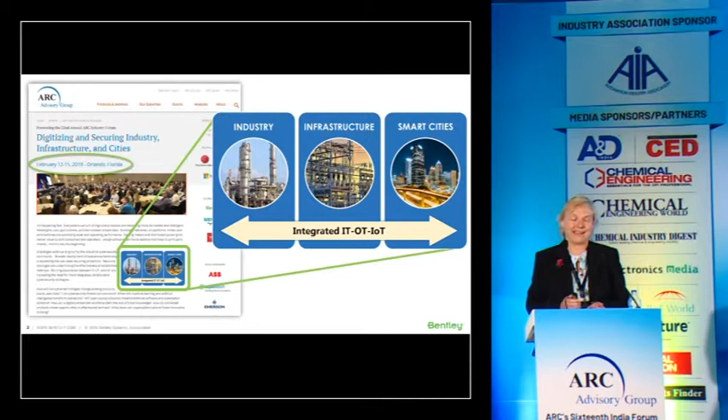So here we go. One of the things that we noticed back at the Orlando Forum was that ARC have expanded beyond industry to infrastructure and smart cities. And this gives me a good opportunity to introduce who Bentley actually is. We are not the vibration monitoring company of Nevada. We're not the car company either, although my accent might confuse you. Basically, Bentley is a software company, and we model and simulate the world of infrastructure. By infrastructure, we mean roads, bridges, railways, buildings, cities, industry, that kind of thing.

ARC ranks us. We respond to three of their reports. First, asset reliability and software services in the industrial space. Also engineering design tools in the BIM space, and you can see we're number one in asset reliability and number two overall in engineering tools, and we're also featured in the GIS report and number two there too, in terms of everything that we do being geographically located.

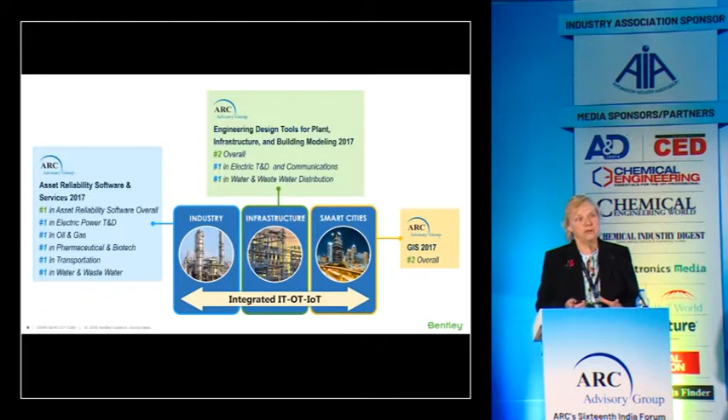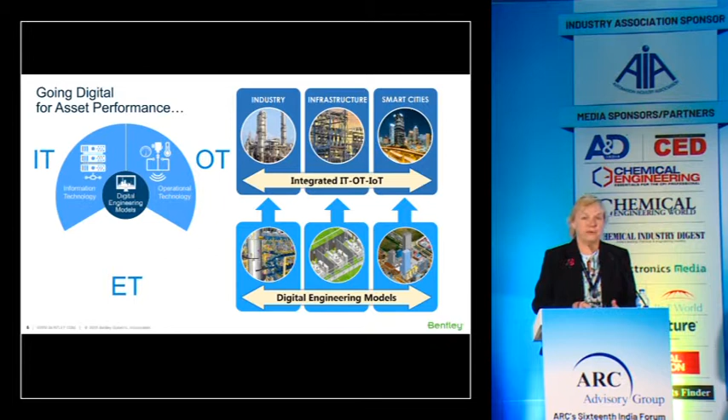So we're a software company that plays in both the operations and the capital project space, simulating and modelling infrastructure. What we bring to the world of the industrial Internet of Things is the convergence of IT and OT with engineering technology through digital engineering models. And we believe that this is a way of making sense of a lot of the information and making it easier to make decisions about all this massive amount of data that you've got when you've got good engineering information that is supporting those decisions to change your operations or to revamp or replace something.

So now I come on to reality modelling. For those of you who aren't quite sure what it is, basically it's the taking of digital photographs and turning those into accurate 3D models. Last year, we integrated in with the photographs laser scanning, and we also introduced a mobile app type of thing, being able to take photographs on a mobile phone and create these models.

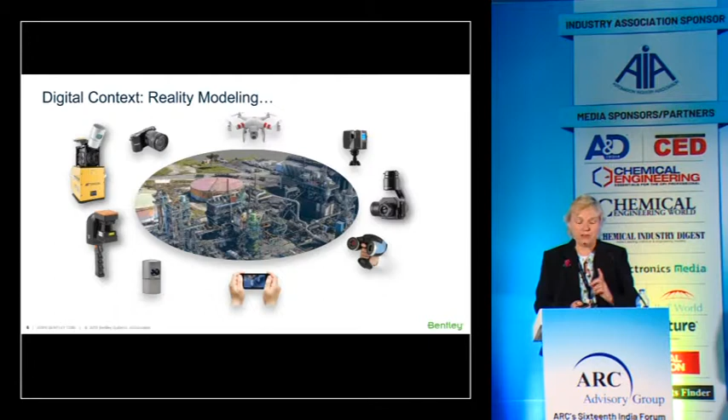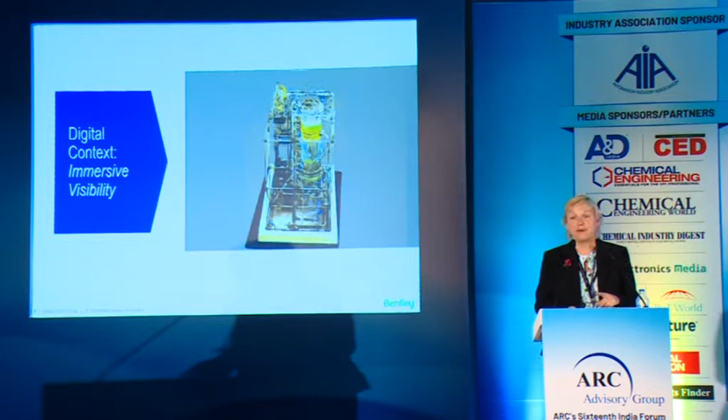Just to give you a little bit of an idea, you might remember this. We worked with Siemens to model this skid plant. My colleague Gernot there took 540 photographs of this skid and produced this reality model of their process automation skid. They'd not been able to laser scan this because there's too much glass and so on, but the reality modeling produced a pretty good model there.

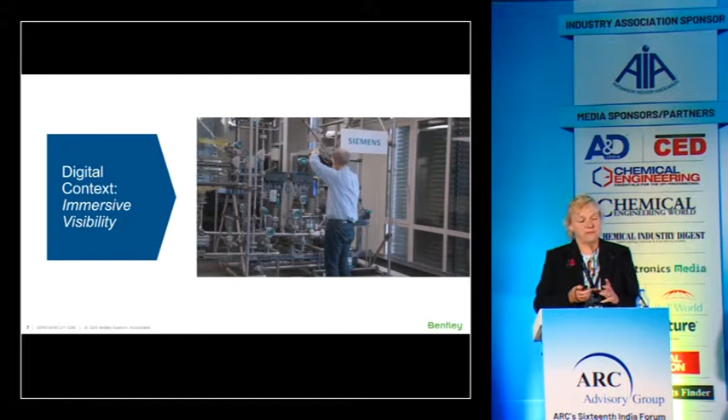So basically it's providing this context of your existing assets in a 3D environment. One of the things that we do every year is ask our users to submit their most impressive projects. And I've got a couple of examples here of the use of reality modelling in the smart cities environment. Basically, this company created a smart city model of the new city in Shenzhen using both hybrid scanning and photogrammetry.

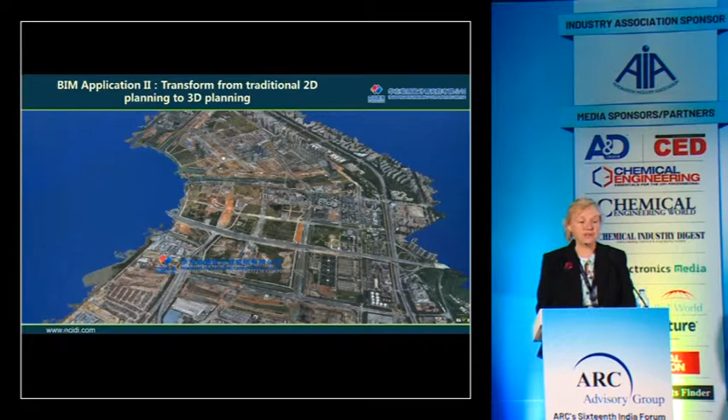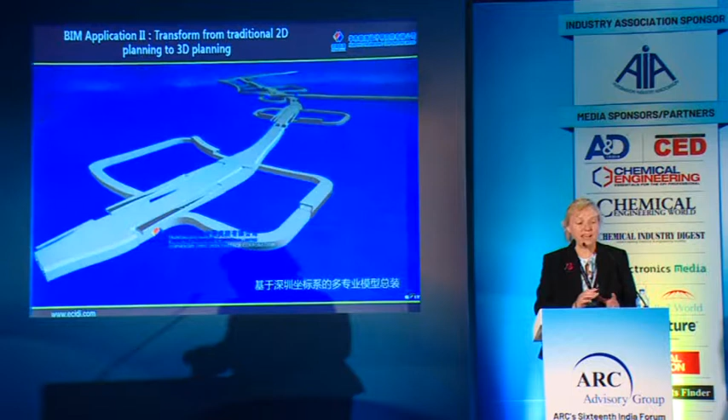But the next example, and the video is going to play, is a BIM application where they've gone from traditional 2D planning to 3D planning, combining reality modelling of what is actually there with the BIM 3D models of what they're planning to build in this city in China, basically.

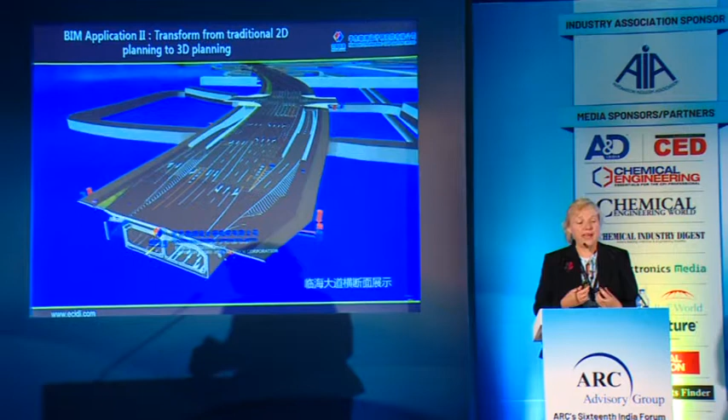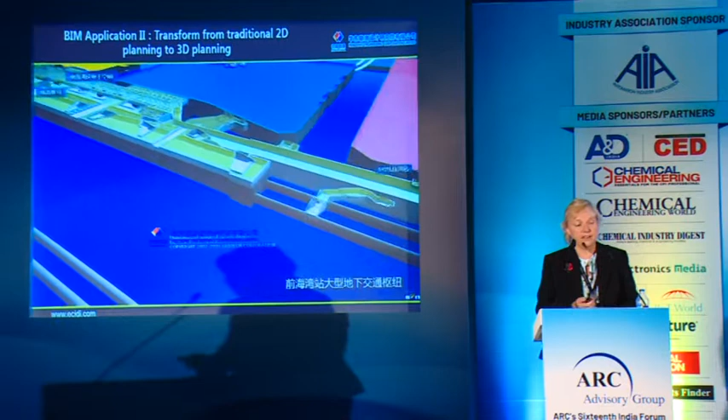You can see as the video runs through how they've combined the 3D designs of the roads and underpasses with the reality model of what's actually there, to give a really good idea of how to plan and execute this project.

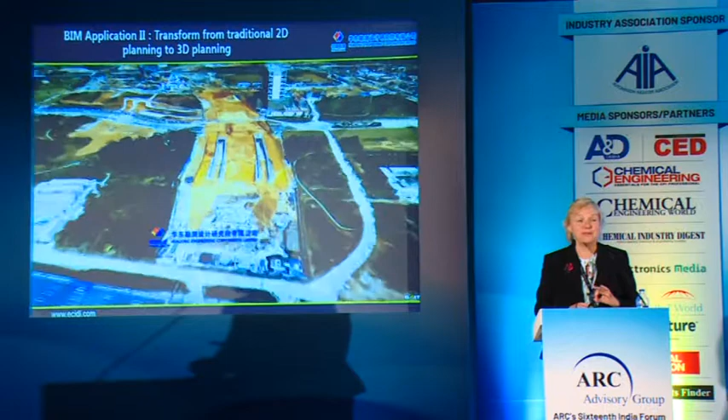This was one of the finalists in the reality modelling category. Interestingly, from 2016 we had 3 submissions in the reality modelling category. In 2017, we had 47 submissions. These two city examples are just a couple of examples - I have another one a little later on.

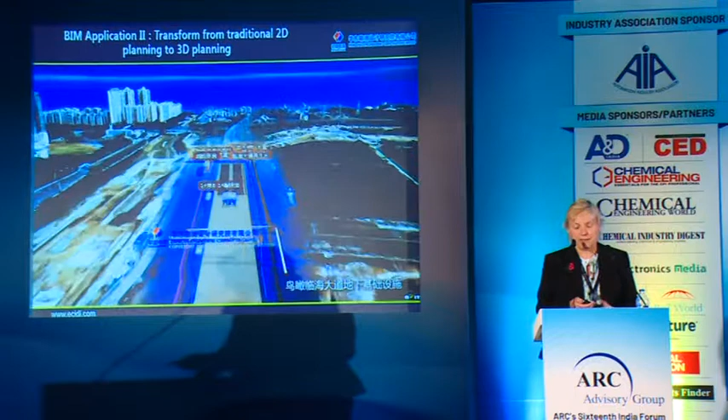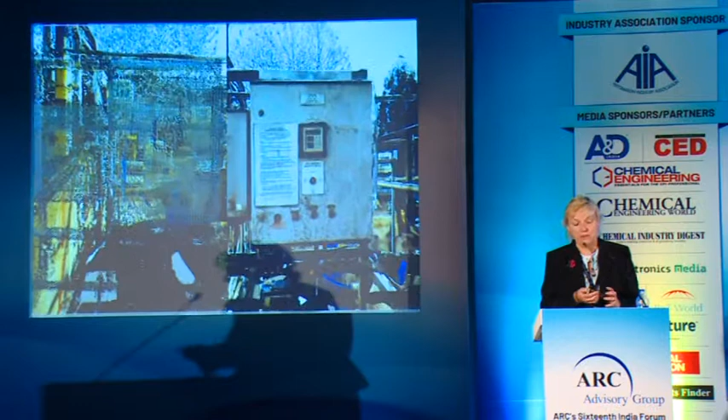I mentioned the integration of laser scanning with reality modelling. As this video zooms in, on the left-hand side you can see laser scanning, and as you approach the model it starts to lose detail - it becomes very granular. But on the right-hand side you have photogrammetry combined with laser scanning to give real precision - you can read the sign, you can measure very accurately. It looks almost like a video of this plant, but this is actually a reality model with a bit of laser scanning, and on the left-hand side is what a laser scan would do.

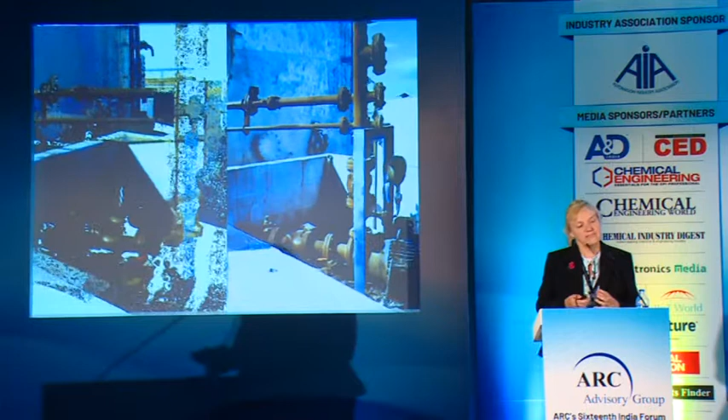Now we're using this technology quite extensively to inspect existing assets - our users are using this technology to inspect assets and also be able to automatically pick up some things. I'm going to come on to that now in a little bit more detail.

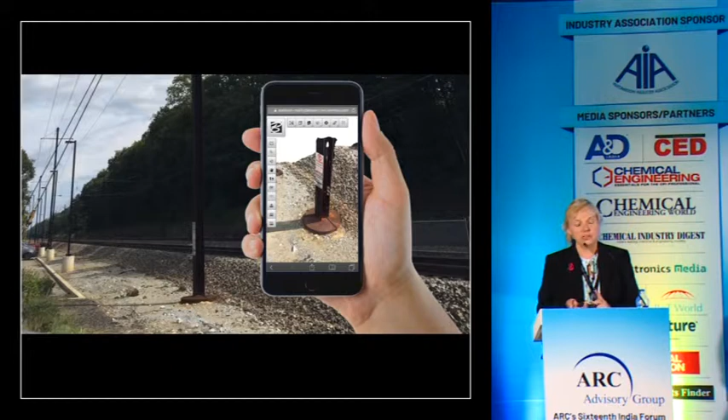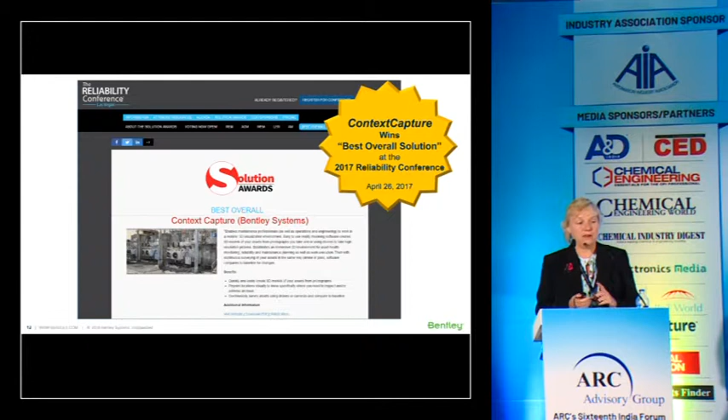I mentioned also the mobile app. We introduced this last year - basically being able to take photographs on your mobile phone and automatically create a small reality model of what you're looking at, then share that with an inspector back at base. This is really revolutionizing a lot of maintenance and inspection. It actually won an award itself last year at one of the main maintenance conferences that happens in the USA.

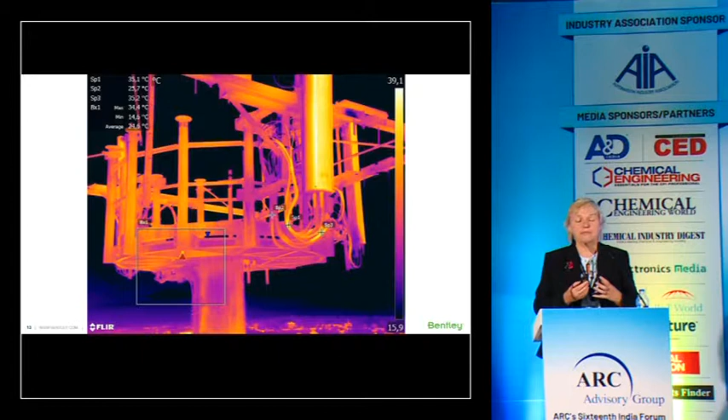Now integrated with reality modelling - with the photogrammetry and the laser scans - we've also added other imaging devices like thermal imaging and things like this.

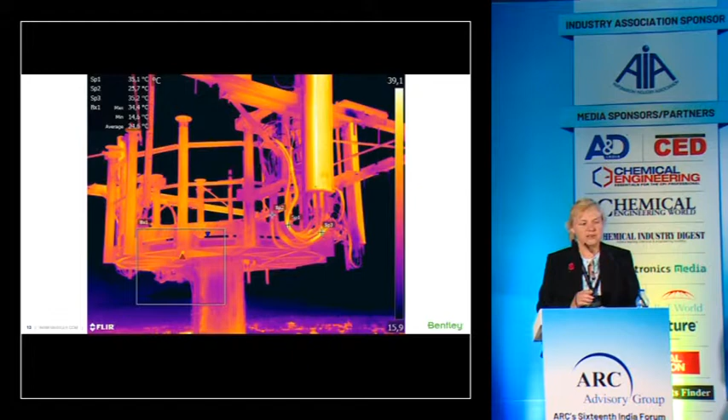I'm going to come now to some examples in the telecoms industry, and I think the telecoms industry are probably the most advanced in terms of using this technology. This was one of the special recognition award winners from last year - another reality modelling example, of inspection of cell towers.

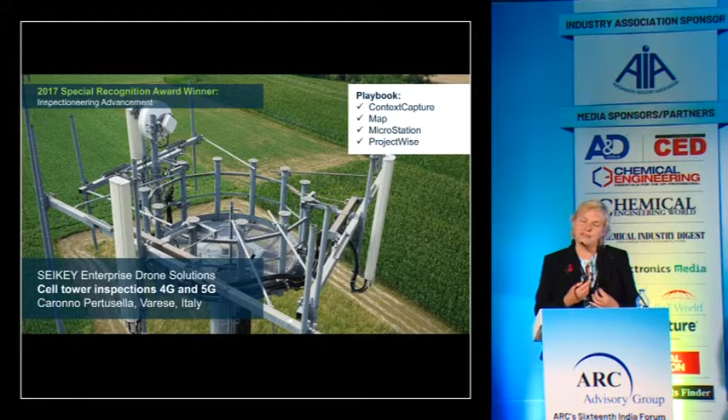Now, these are very dangerous things to inspect if you're having to send a person up there. So these days they're sending drones up these telecoms towers - here's a video of exactly that, a drone being flown around the telecom tower. The software can now program the drone to take photographs at exactly the right point and fly it in order to capture the best photographs to model these telecom towers very accurately. That's been an advancement over the past year or so.

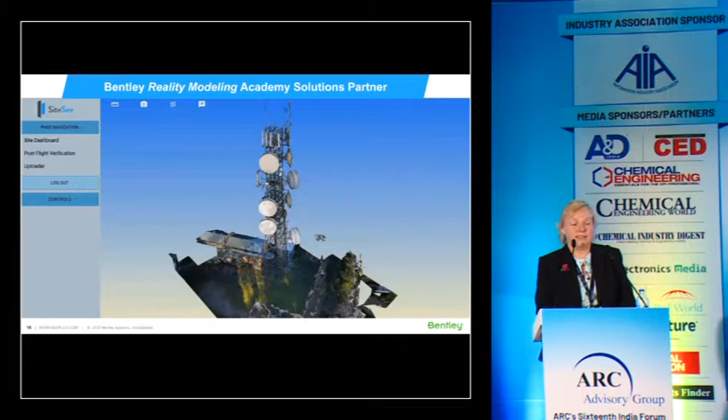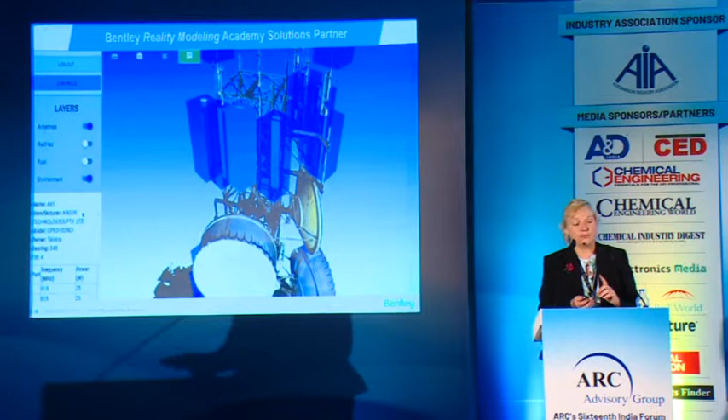Now, interestingly, we're using machine learning and artificial intelligence to automatically identify assets within the reality model. In this case you can see the antennae have been automatically identified, and also the radar dishes, being able to overlay where the radar radiation zones might be - so the antennae and assets on this telecom tower have now been automatically identified by the software.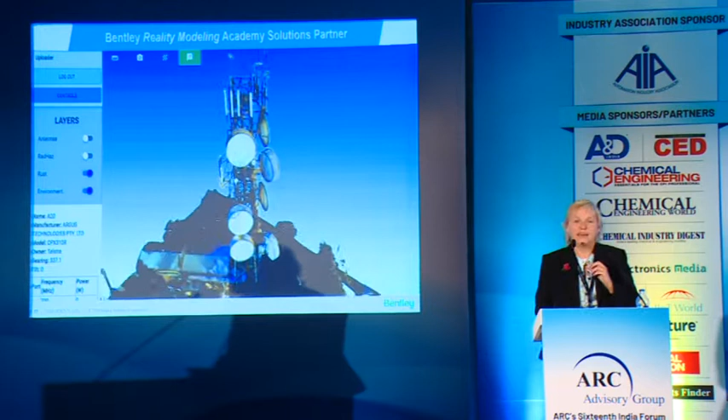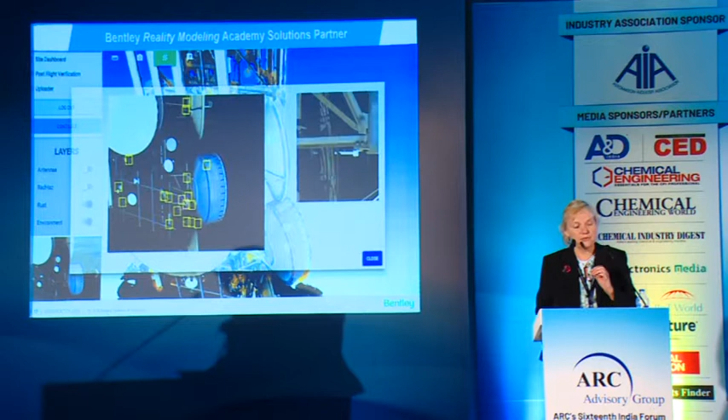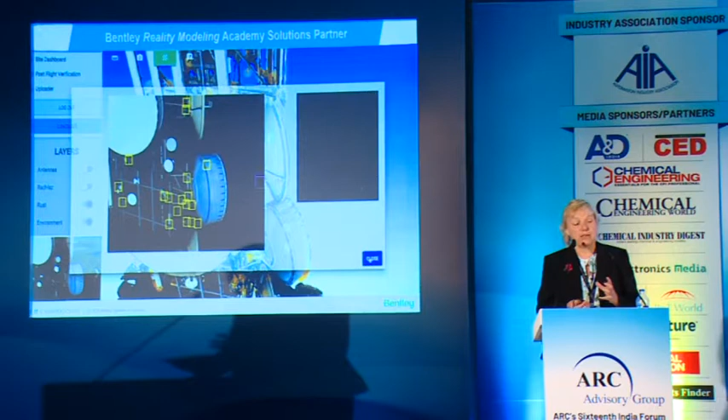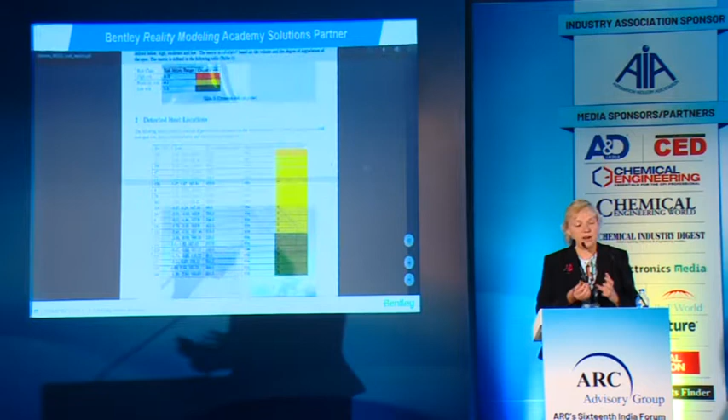And this next bit really gets me very excited - including rust. The software has automatically identified areas of rust up this telecom tower, and you can zoom in on the individual photographs of those spots of rust for the inspector down on the ground to safely figure out whether this is an important rusty bit or not, and categorize those points of rust, then create a report such as is shown here, as to which areas of rust up this telecoms tower we really need to look at - maybe change out that strut, and so on.

This machine learning technology on top of the reality models is really where the software has actually got to at this stage. We're now doing automatic identification of cracks in bridges, of cracks in pipes as well, and being able to automatically identify various assets. I think if I come back next year and talk to you about where this technology is at, we'll have got to the point where you have constant surveying and the software itself able to bring to the attention of maintenance or inspectors areas of concern out of all this vast quantity of data.

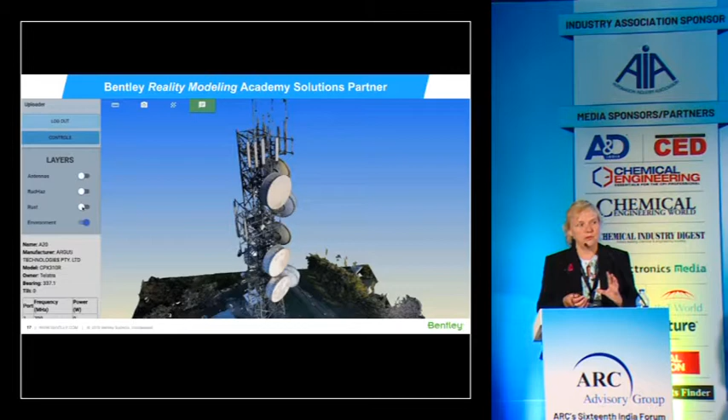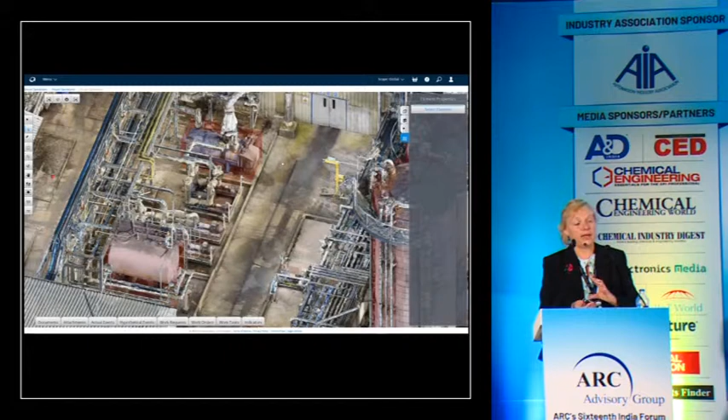So here's something that we showed 3 weeks ago now at the ACHEMA event. This is the latest user interface on top of our asset performance software for reality modelling.

In the process industry world, we've got to the point of automatically identifying major pieces of equipment and vessels and so on, and tying those in with your asset performance, your maintenance work orders, those kind of things, so that you can see the piece of equipment that the maintenance guy may need to work on and all its documentation based in the context of the actual plant itself.

And you can see here we've linked this to the theoretical event. So maybe if this pump is causing an issue, what could possibly be going wrong with that and that type of thing. This is a technology preview of this interface. We're looking for feedback from our users as to whether this works really well in a maintenance environment.

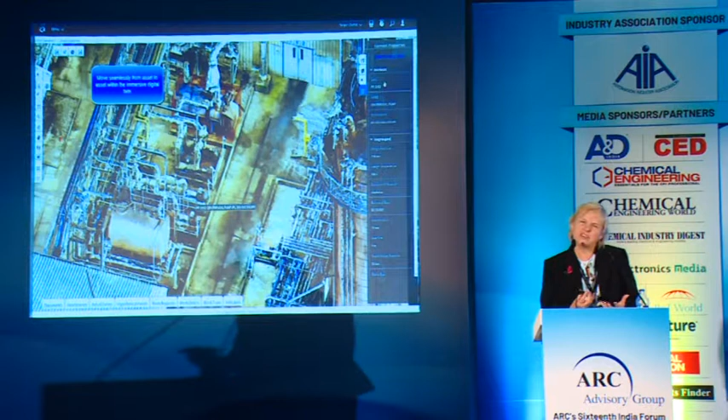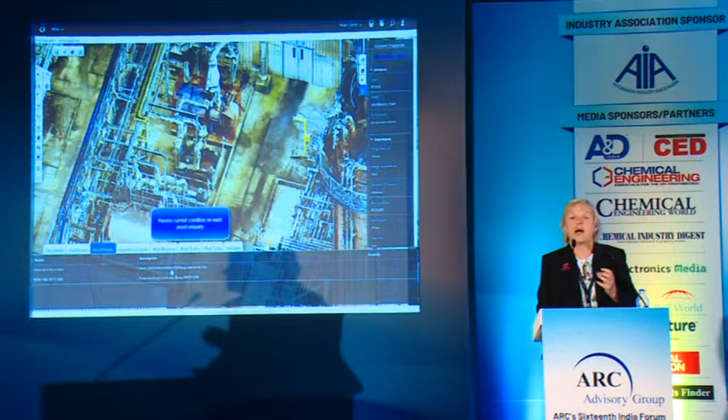We'll now start to zoom. One of the areas that we're particularly interested in is being able to relate the reality model to other documentation, like the P&ID itself.

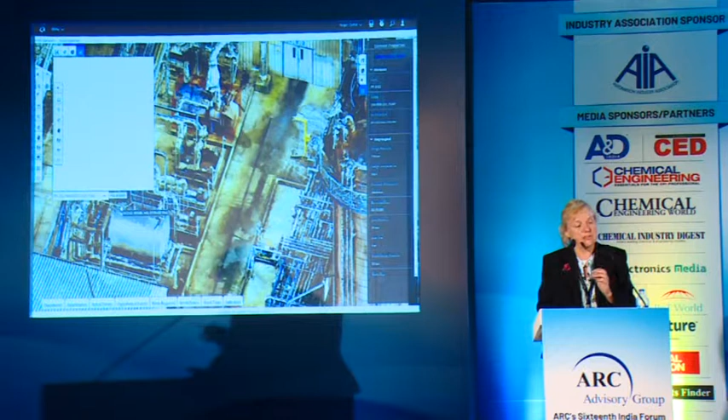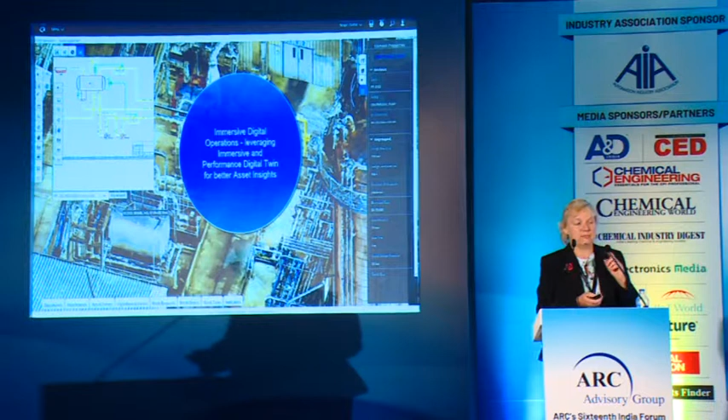So you can see here it's zoomed in, it's selected the pump and zoomed in on that pump, and now is bringing up the P&ID of the same pump. It automatically zooms into that pump on that P&ID, so that you can have, within the context of your existing model of your asset, also the intelligent P&ID information and anything else that you might have associated with that.

Now coming on to what we're doing with Siemens. Bentley has a strong partnership with Siemens as we're really trying to accelerate digitalization, accelerate the maintenance and management of digital twins across the life cycle of the asset.

Samir talked earlier about how Siemens are modeling totally from the concept all the way through to servicing and maintenance, creating an entire digital asset across the life of their particular products. Bentley, in partnership with Siemens, we provide the context in which their equipment is operating - the factory in which it's located, the production lines, the process plant itself, the tracks on which their trains might be running, and so on and so forth.

We had last year at our main conference, the head of their information technology present about all the areas that we're working with Siemens, and here you can see those things listed out. I can go into some of them in more detail, but I'm going to focus more on the process industry side, because that's been the latest, most interesting development.

Mobility is our work with them in the railways and the rail industry. Building technology is obviously heating management of buildings like this. Energy management is the transmission and distribution, electric power, gas networks. We've integrated our GIS environment with their energy management environment so that a utility company can optimize how electricity is produced and used across their entire network. That was something that's been quite difficult to do so far.

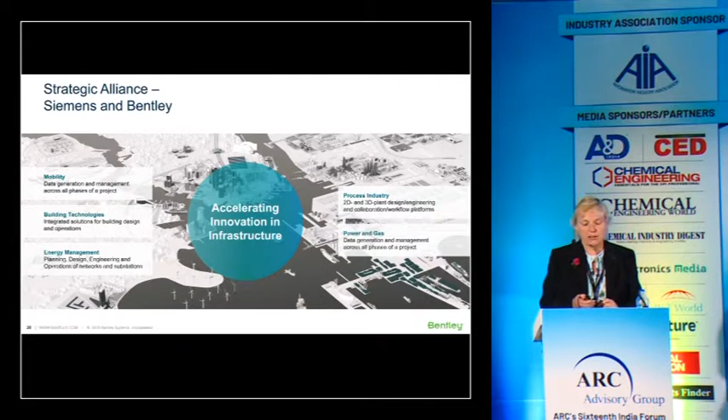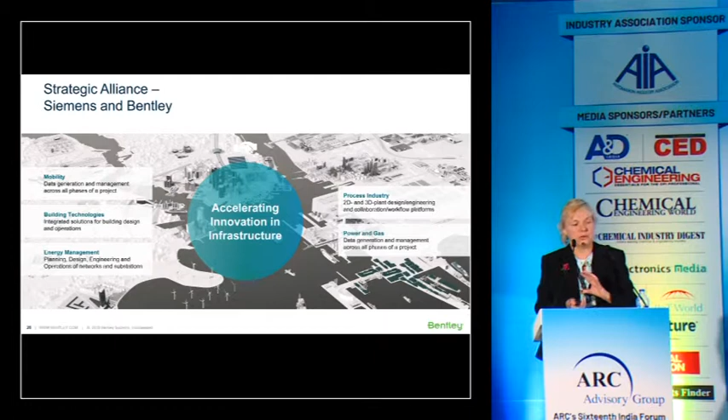And I'm going to show you now a demonstration that we put together that was using current technology to show how this integration between the Siemens world and the Bentley world could work.

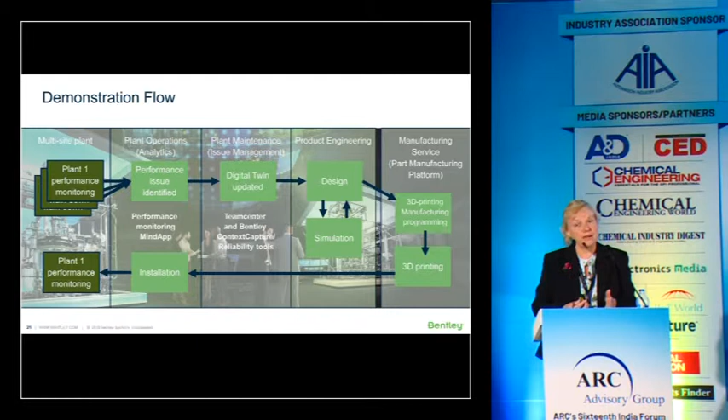So basically, you have the monitoring of your plant, and something's going wrong, there's an issue identified, the digital twin is updated, is identified, and then a replacement part is identified, and then automatically 3D manufactured, 3D printed, installed, and back to monitoring the plant's performance. So what we tried to prove is that you can, without drawings or anything like that, have a whole process that is totally digitally enabled with current technologies.

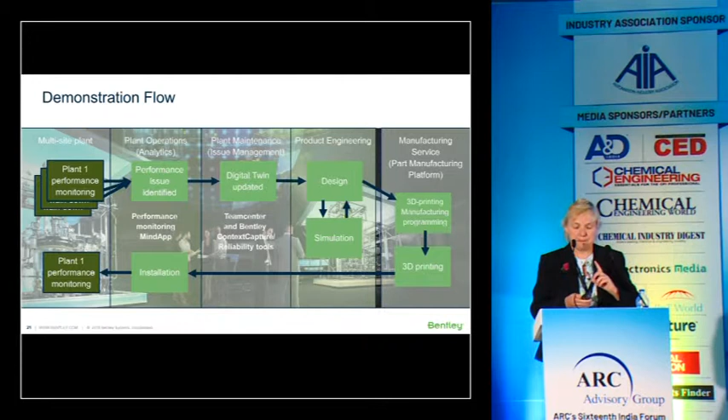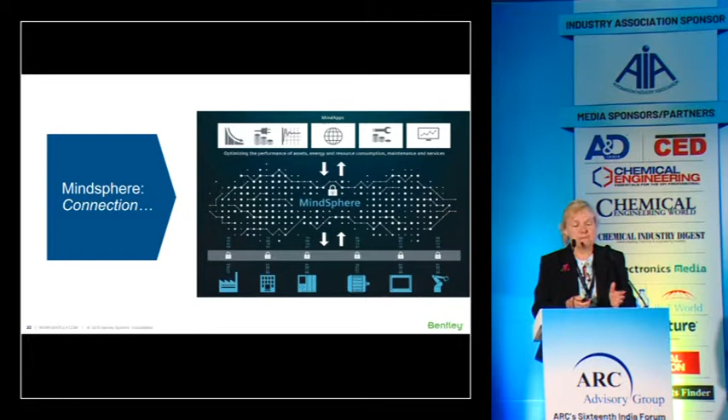First of all, we had the logging of what's going wrong on the plant, and this was using MindSphere. We developed an application running on top of MindSphere to bring together operational data with engineering data. We've also brought the reality models into virtual reality headsets.

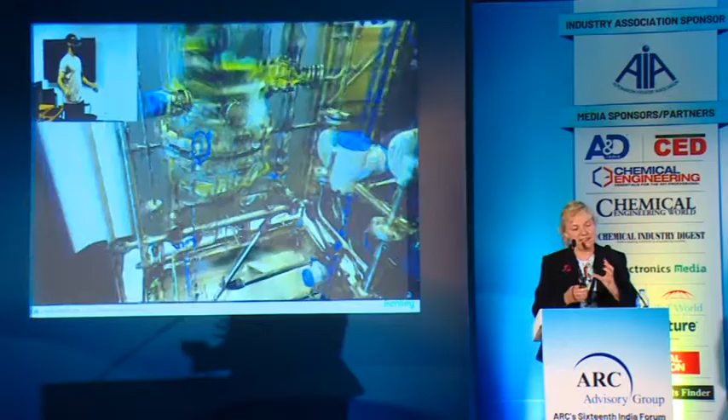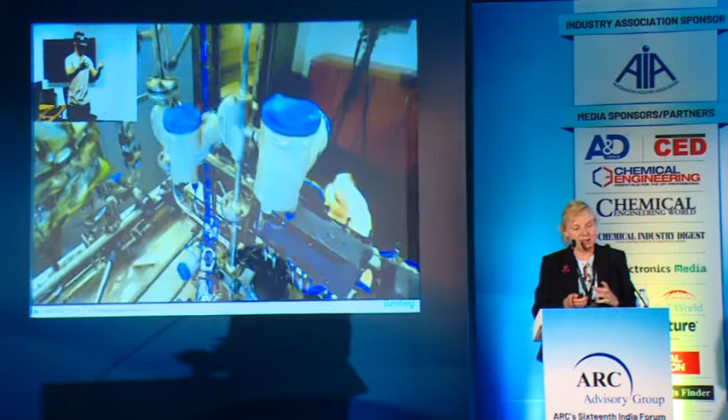We're still working on this area, but you can see that same reality model of the skid. The guy is looking around it as if he was stood by it, and he can go into quite some detail and see how detailed that reality model is of that skid.

He's probably in our office in Exton, and this plant is in Karlsruhe, Germany. Having identified there's a fault with a particular pump, this is an example of how Siemens simulates the pumps as they're operating, how the pump might vibrate and move around.

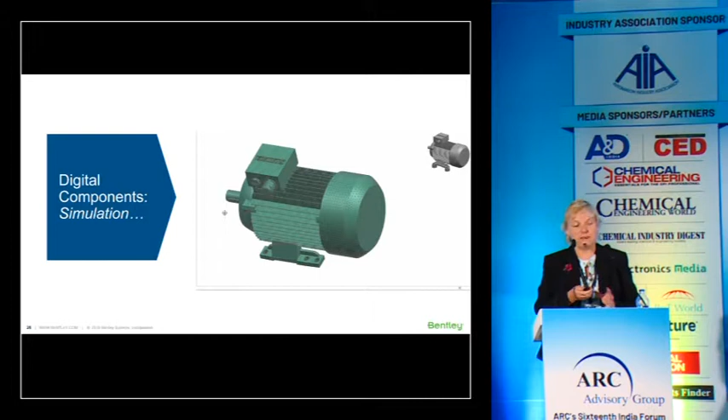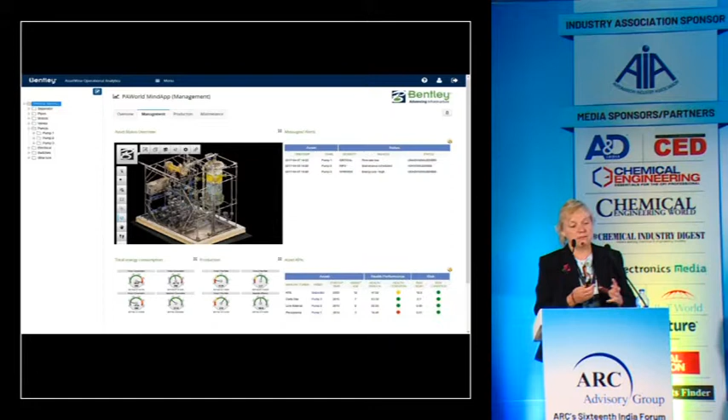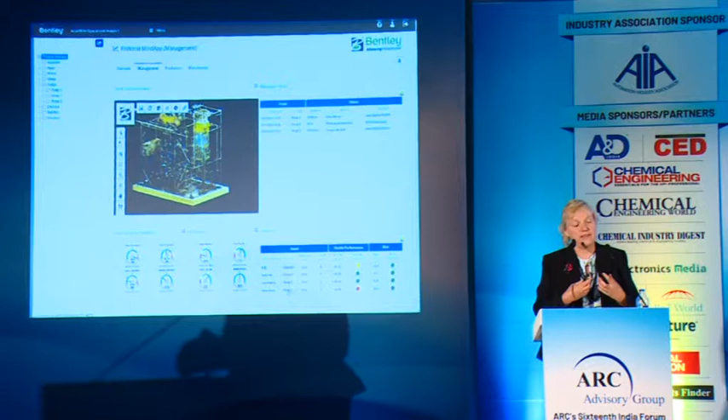So then we bring all of this together. This is the Mind app, the demonstration I showed last year, where we have the reality model within the MindSphere application. We have operational information coming through about how the plant's running, the flow rates and electricity consumption of those pumps. You can see here pump 1 has a real problem - it's using a lot of electricity but not pumping anything.

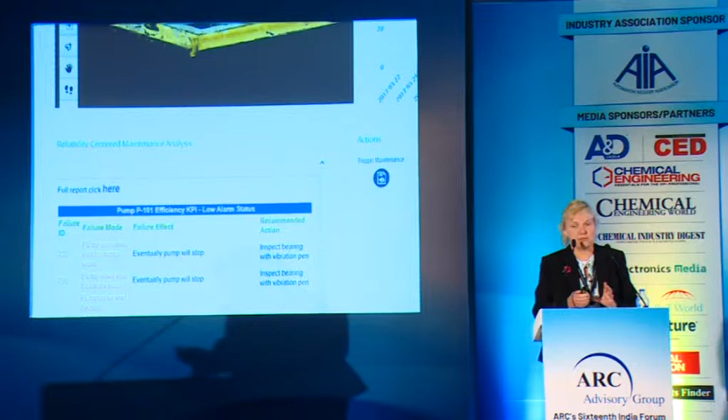We've homed in on the reality model, in yellow, showing what is wrong with that pump, and brought up some of the issues. Basically, the pump needs replacing. That's what I showed you last year.

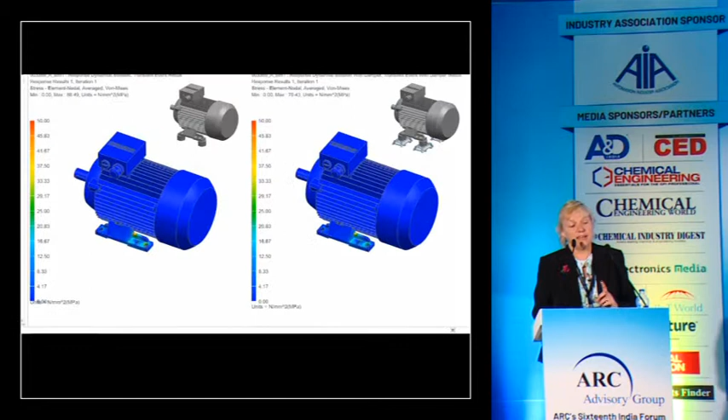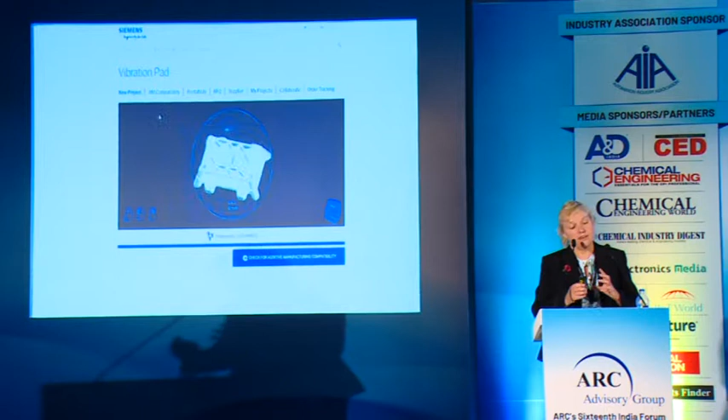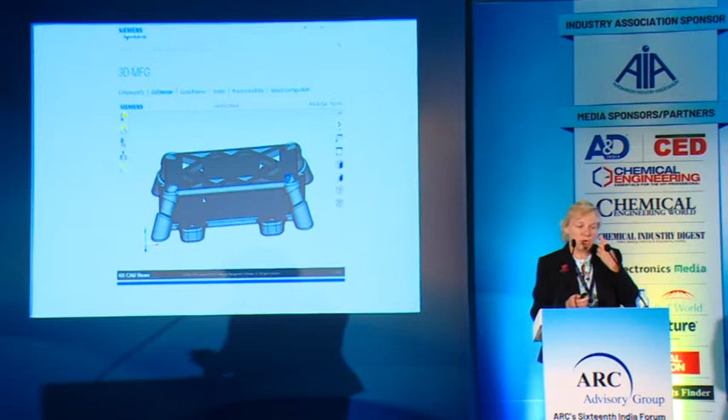We went on beyond that with Siemens to change that pump out, simulating a new pump being put in place. It needed a new vibration pad, and this is all the Siemens technology in 3D, simulating the pump and simulating the new vibration pad that's needed.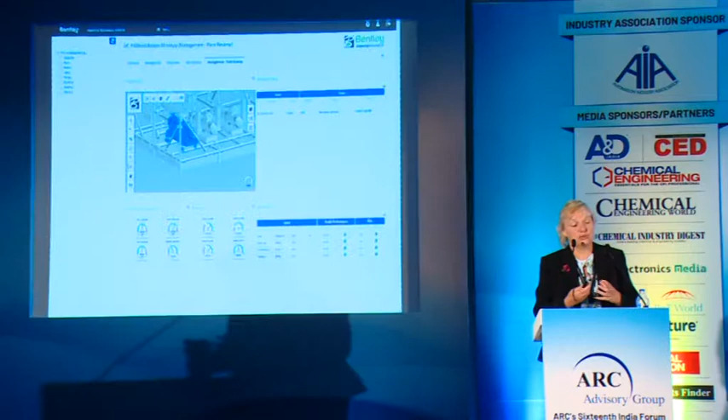And they could actually 3D manufacture this vibration pad in order to change out that pump. Then we brought that new pump back into the digital twin of the asset, showing the new pump in place with the new vibration pads attached.

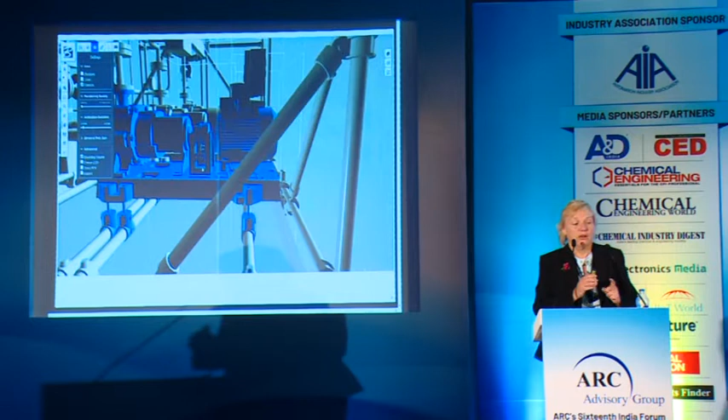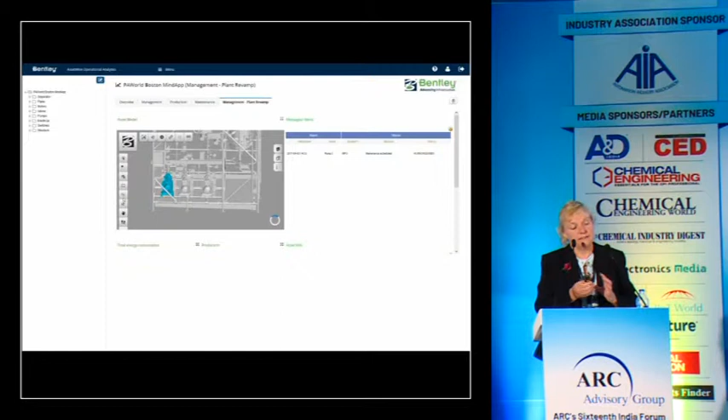Now, what we had to do for that was convert the 3D model, or the reality model, into this 3D world to bring that in. But the technology is changing so rapidly that bringing just the new real digital model of that pump into the reality model is where things are heading very quickly.

So that shows a total round-tripping of identifying an issue with a pump, finding the pump, even manufacturing the new tie-in points into the manufacturing process, and then replacing that pump totally within a digital world.

Did you see any drawings? No, it was all done within the modelling environment. Oh, let me just go back a moment, sorry, because he starts straight away.

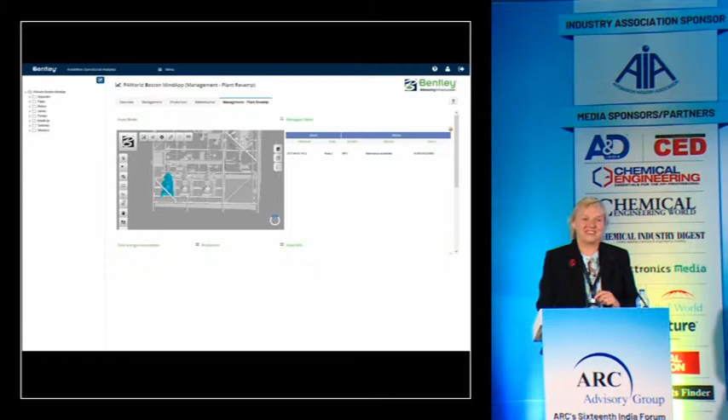So sorry, I'm now going to show you a video. It's a 2-minute video of what we were talking about 2 weeks ago at the ACHEMA event, going on with the process industry.

How do you keep engineering information updated in real time and ensure any changes like this are tracked and identified, so that people know what's going on and know what needs to be changed? We have Bentley and Siemens' vision together to create an app for that, if you like, and we've briefed ARC.

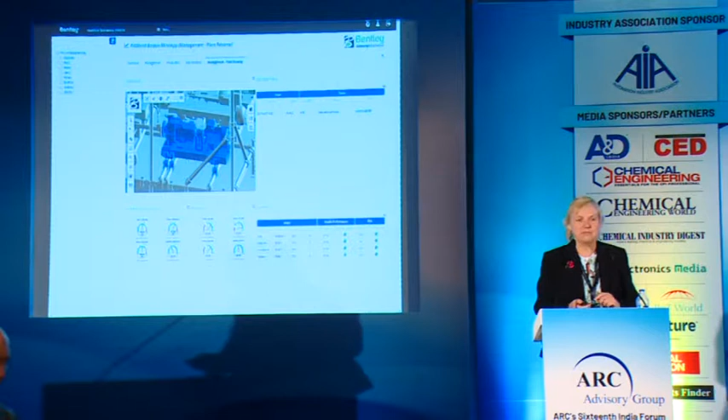You'll see Valentine talking about this in the next video. I think Valentine presented last year here at the ARC Forum in India, so you might recognise him. He's one of the senior analysts who knows both Bentley software and Siemens software. So let's listen to what we've identified together and what we're doing for the process industry.

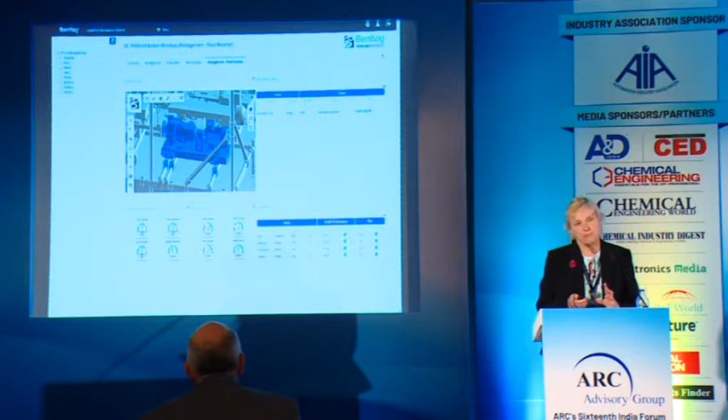ARC, Bentley and Siemens observed important challenges and changing requirements in asset lifecycle information management in the process industries, in particular in operating plants. First of all, there is an increasing need for collaboration and reviews across disciplines and companies.

Second, handover, updates, validation and change management of asset data is poor, and as a result, information is inaccurate, inconsistent, and dated. Third, huge parts of the asset information are not being used today. We call this dark data.

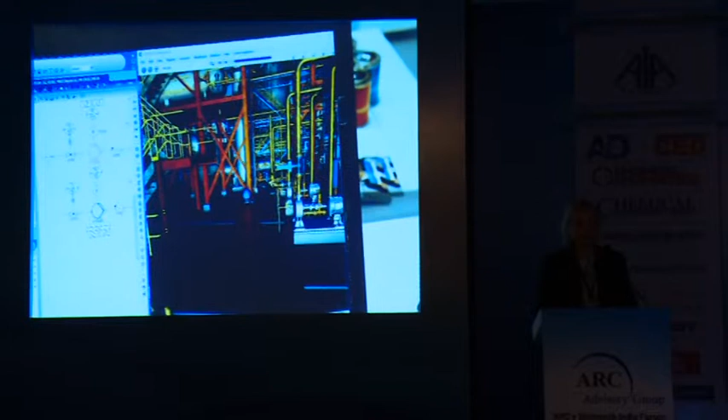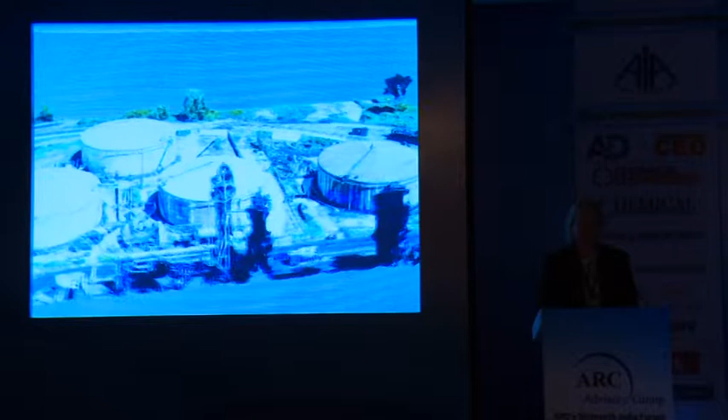Functional, operational, and spatial information are often disconnected. This is important because plant reliability, maintenance efficiency, and regulatory compliance depend on accurate and up-to-date data. Overcoming these challenges would create significant potential in terms of cost savings and increased revenues of operating plants.

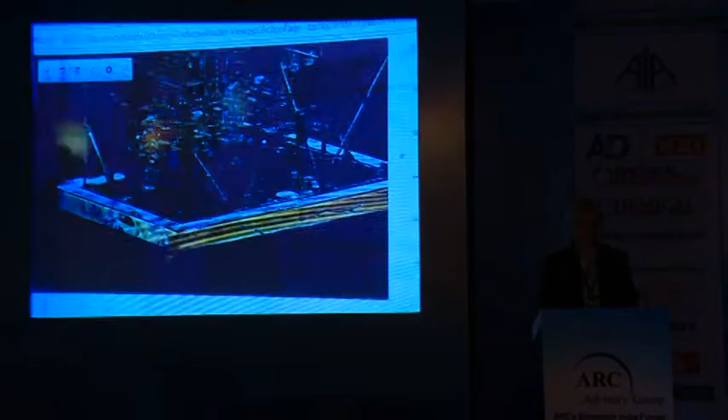Using digitalization, process engineering, maintenance, 3D representation and operational performance information can be integrated in new and more effective ways, providing rich context to all disciplines involved. Scalability and flexibility can be provided when implemented in a secure, pure or hybrid cloud.

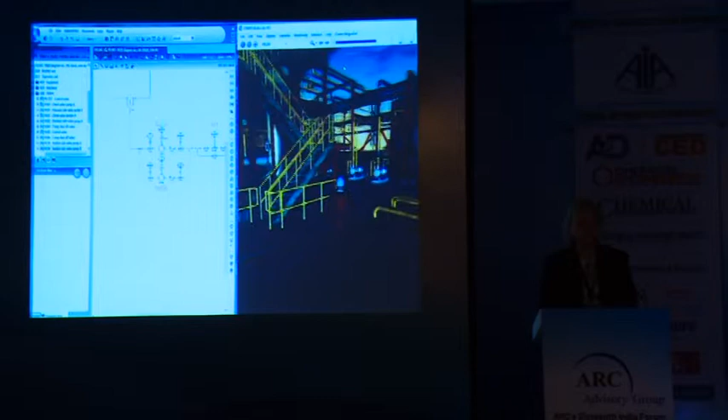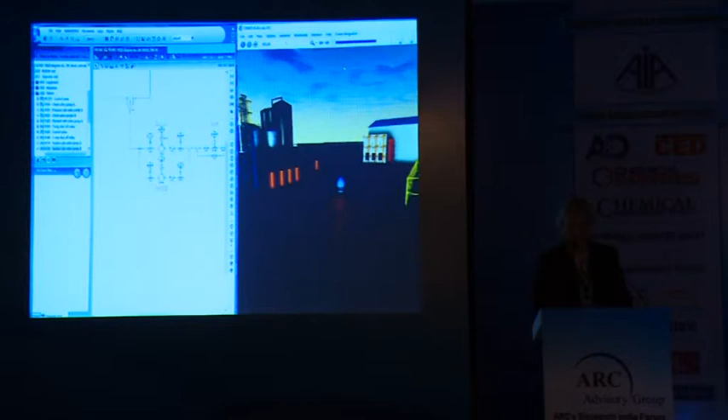The accurate, up-to-date, accessible digital twin, together with best practice workflows, can reduce time to operational readiness. This also enables continuous improvement and operational excellence, thereby improving sustainability and return on assets. Any solution must therefore support digital workflows.

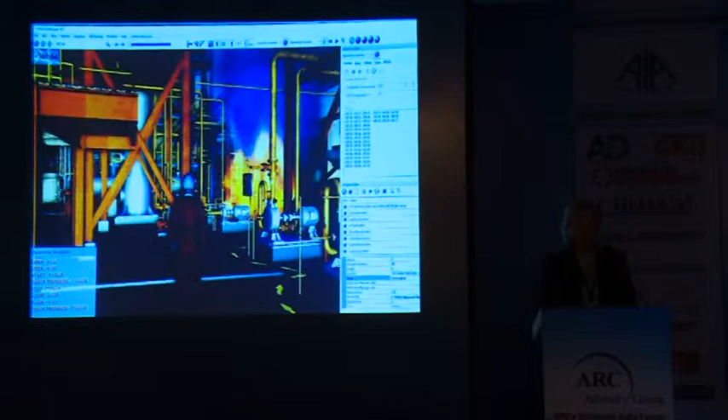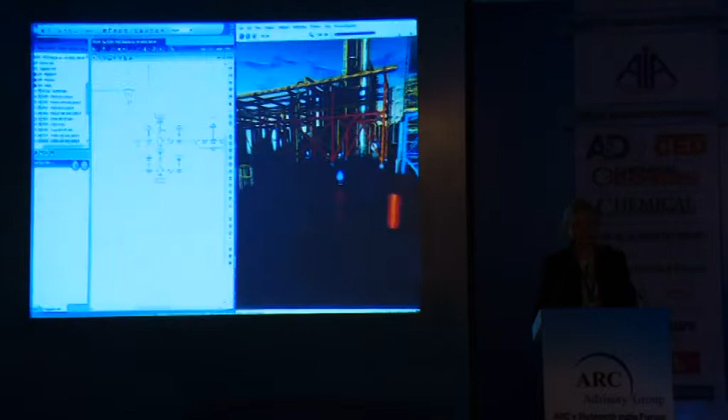I recently talked with Bentley and Siemens about their vision, which emerges from the described challenges, and using possibilities provided by digitalization. The vision Siemens and Bentley described to me will be a portal in a cloud environment, which federates data from many online and offline sources, and provides digital workflows provided through a set of extensible microservices.

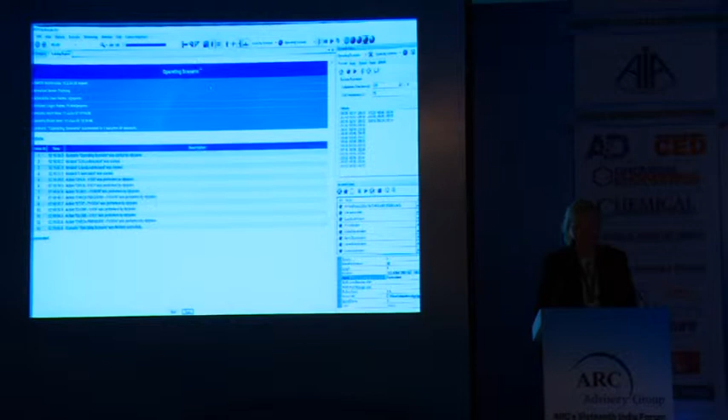It should ingest, analyze, validate, and link data from sources that are difficult to access, and the traceability of changes made to their data and their validation should considerably increase trustworthiness of data and improve compliance.

In view of the impact it's likely to have, ARC will closely follow this project, and we look forward to report on early user experiences.

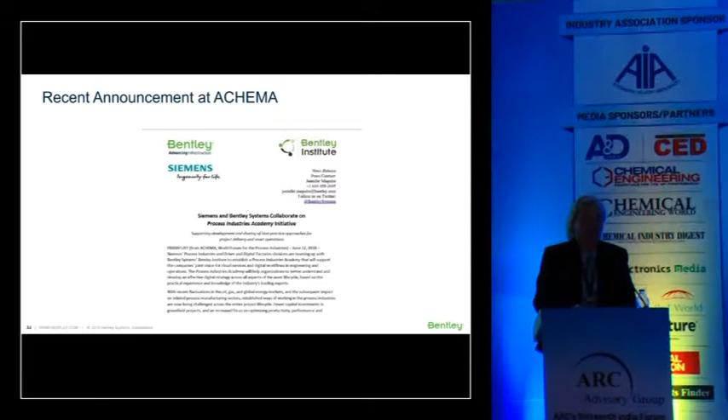Valentijn talked about the vision that Siemens and ourselves have for developing a cloud-based portal environment to basically keep engineering information and data, the digital twin, up to date across the life cycle of the application.

He also talked about microservices, and Sal mentioned this earlier, that software companies are moving fast to move on to microservices, apps that do various stuff, and that's exactly what the vision is that we're developing together now.

We also announced at ACHEMA that this is all very well, technology, software is all very well, but you need to change the workforce. The second speaker from NASSCOM talked about an 80 million skilled people shortage and so on. You're not going to create digital natives overnight.

Knowing this, and understanding and modelling what has been successfully done in the UK, particularly in the construction and railway industry, to take an existing fairly staid construction workforce and make them BIM natives and so on.

Bentley and Siemens are joining forces to create a process industries academy, where best practices can be shared.

Your current engineers and operations and maintenance folk can get together and talk about how to use data, why data is important, and so on. So we announced three weeks ago that Bentley and Siemens are joining forces to create this Process Industries Academy.